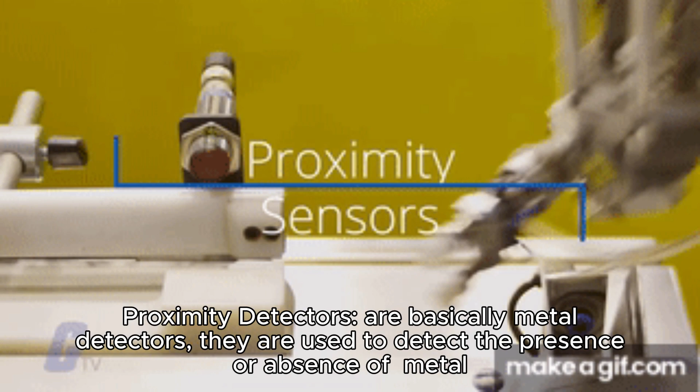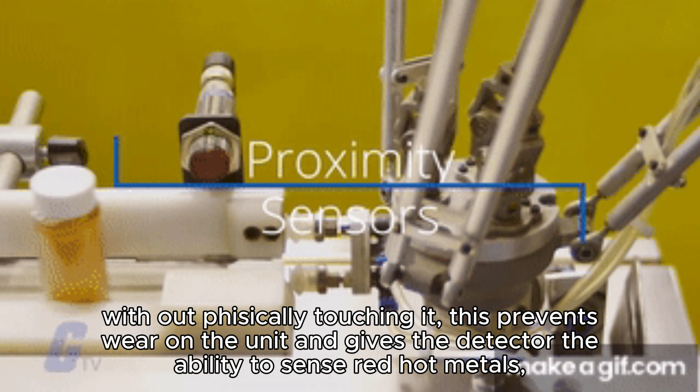Proximity detectors are basically metal detectors. They are used to detect the presence or absence of metal without physically touching it. This prevents wear on the unit and gives the detector the ability to sense red-hot metals. Most proximity detectors are designed to detect ferrous metals only, but there are some units that detect all metal.

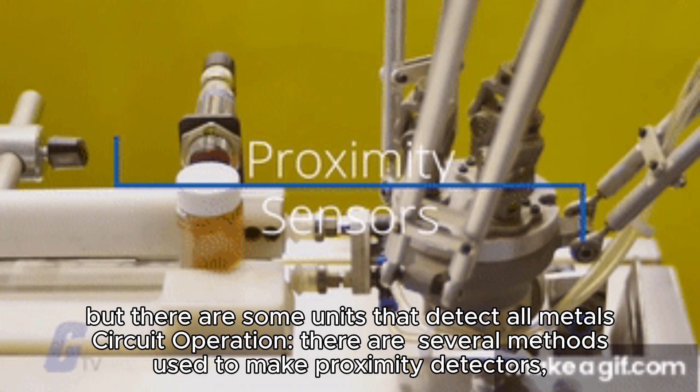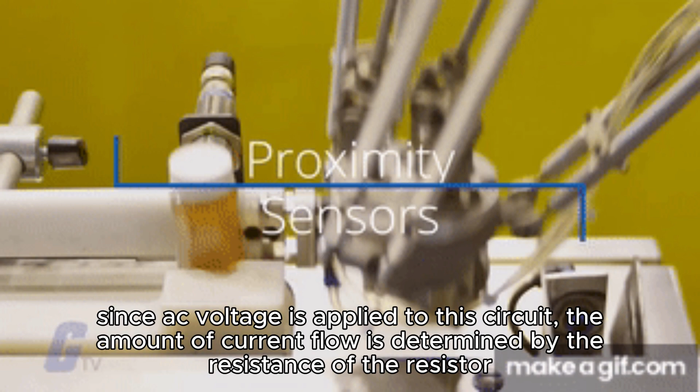Circuit operation. There are several methods used to make proximity detectors. Basically, the sensor coil is connected through a series resistor to an oscillator and a voltage detector. Since AC voltage is applied to this circuit, the amount of current flow is determined by the resistance of the resistor and the inductive reactance of the coil. The voltage drop across the resistor is proportional to its resistance and the amount of current flow.

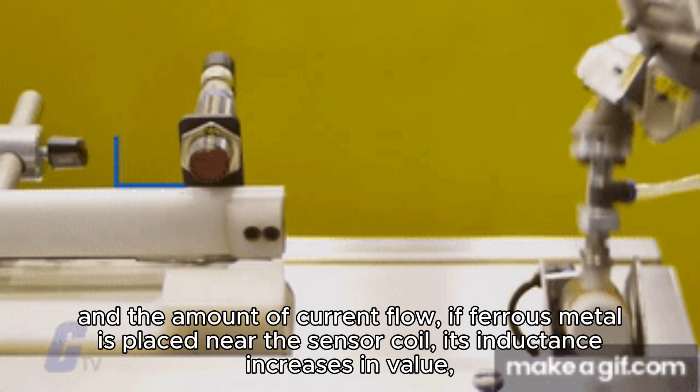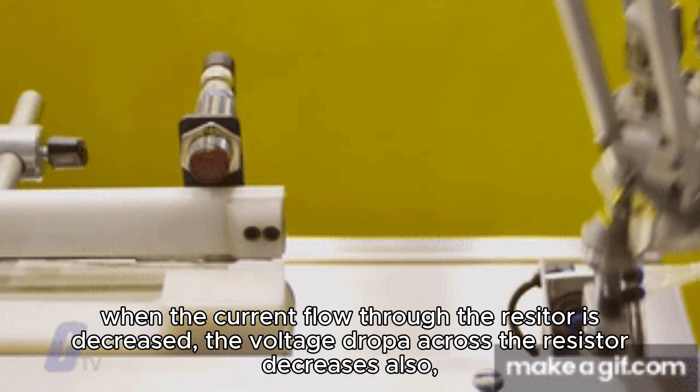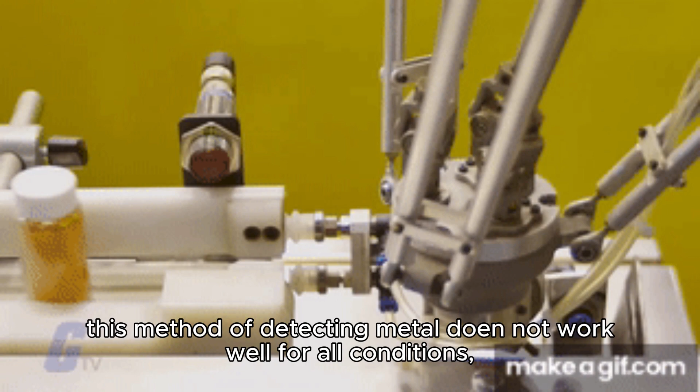If ferrous metal is placed near the sensor coil, its inductance increases in value. This causes an increase in inductive reactance and a decrease in the amount of current flow through the circuit. When the current flow through the resistor is decreased, the voltage drop across the resistor decreases also. The drop in voltage can be used to turn relays or other devices on or off. This method of detecting metal does not work well for all conditions.

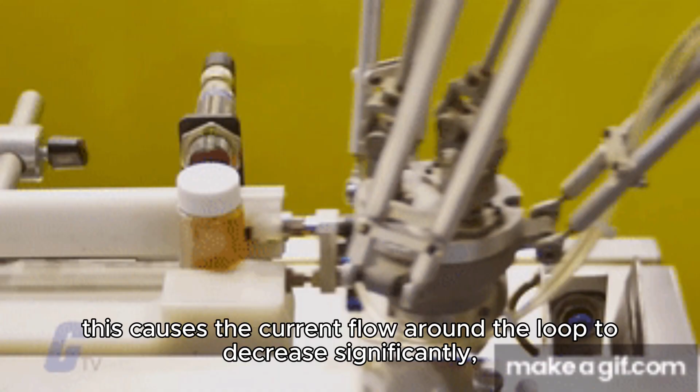When ferrous metal is placed near the sensor, the inductance of the coil increases. When the inductance of the coil changes, the tank circuit no longer resonates to the frequency of the oscillator. This causes the current flow around the loop to decrease significantly. The decrease of current flow through the sensor coil causes the secondary voltage to drop also. Notice that both types of circuits depend on a ferrous metal to change the inductance of a coil.

If a detector is to be used to detect non-ferrous metals, some means other than changing the inductance of the coil must be used. All metal detectors operate at radio frequencies, and the balance of the tank circuit is used to keep the oscillator running. If the tank circuit becomes unbalanced, the oscillator stops operating.

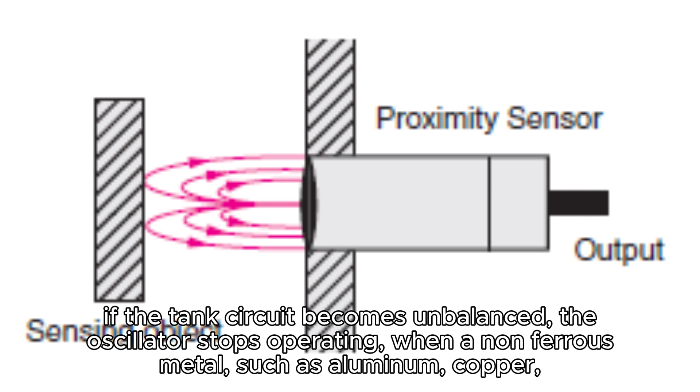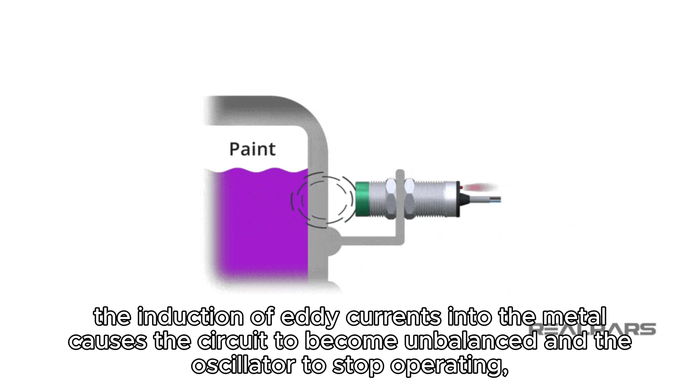When a non-ferrous metal, such as aluminum, copper, or brass, is placed near the sensor coil, eddy currents are induced into the surface of the metal. The induction of eddy currents into the metal causes the circuit to become unbalanced and the oscillator to stop operating. When the oscillator stops operating, some other part of the circuit signals an output to turn on or off.

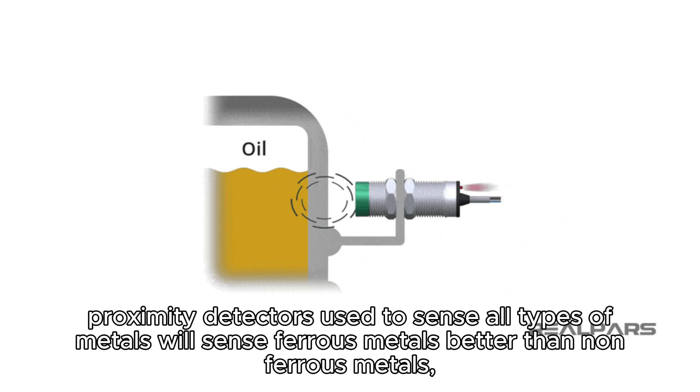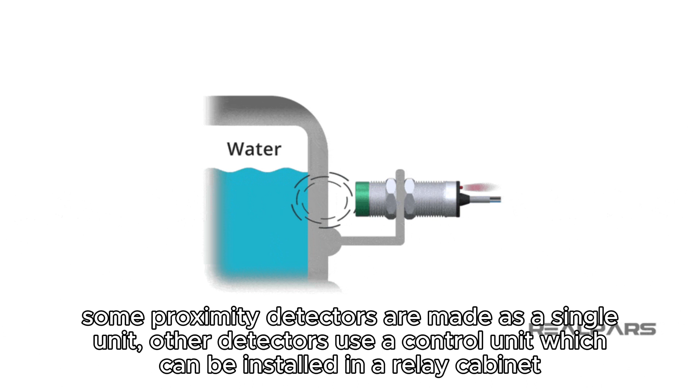Proximity detectors used to sense all types of metals will sense ferrous metals better than non-ferrous metals. A ferrous metal can be sensed at about 3 times the distance of a non-ferrous metal. Mounting. Some proximity detectors are made as a single unit. Other detectors use a control unit which can be installed in a relay cabinet, and a sensor which is mounted at a remote location, such as a conveyor line or assembly line, such as we use in PLC today.

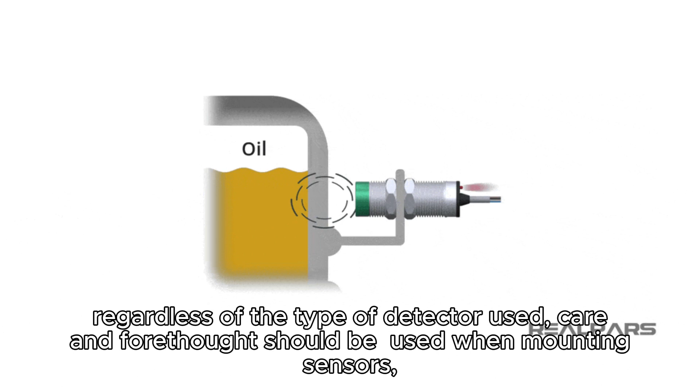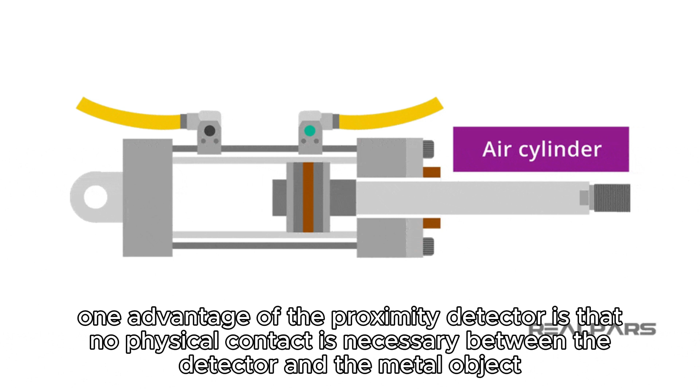Regardless of the type of detector used, care and forethought should be used when mounting sensors. The sensor must be near enough to the target metal to provide a strong positive signal, but it should not be so near that there is a possibility of the sensor being hit by the metal object being detected. One advantage of the proximity detector is that no physical contact is necessary between the detector and the metal object. For the detector to sense the object, sensors should be mounted as far away from other metals as possible. This is especially true for sensors used with units designed to detect all types of metals.

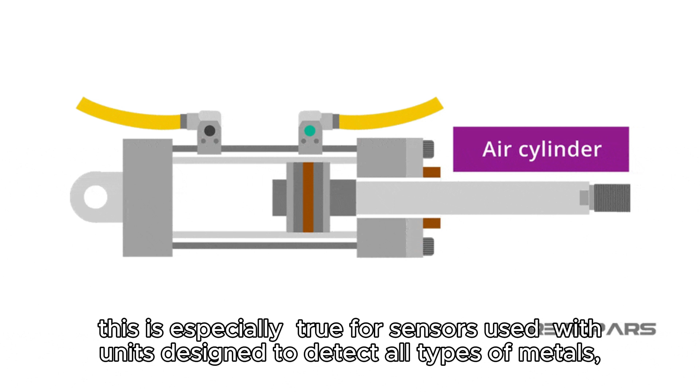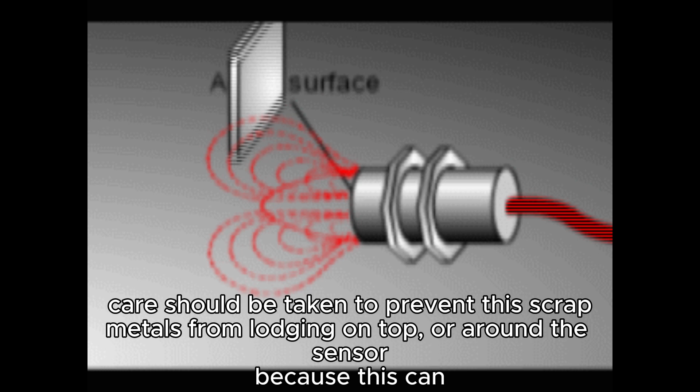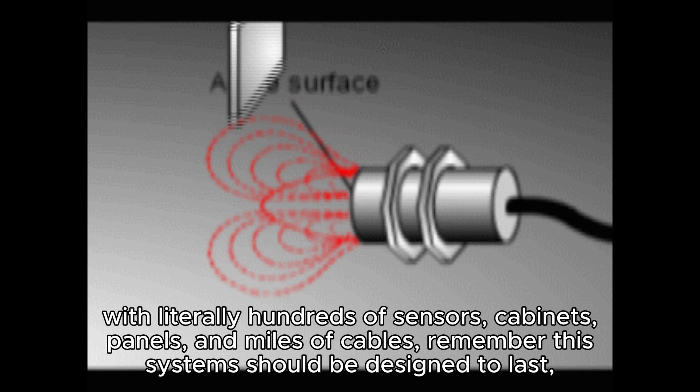If the sensor is to be mounted in an area where metal shavings or other types of scrap metals exist, care should be taken to prevent the scrap metals from lodging on top or around the sensor because this can affect performance and accuracy. In the industry, use clear, shatterproof shields to protect sensors and other parts of the intricate systems. Most industrial systems today, for example conveyor lines, can be a couple hundred feet long to thousands of feet long, with literally hundreds of sensors, cabinets, panels, and miles of cables. Remember, the systems should be designed to last and tested thoroughly.

Capacitive proximity detectors. Although proximity detectors are generally considered to be metal detectors, there are other types that sense the presence of objects that do not contain metal of any kind. One type of these detectors operates on a change of capacitance. When an object is brought into the proximity of one of these detectors, a change of capacitance causes the detector to activate. Since capacitive proximity detectors do not depend on metal to operate, they will sense virtually any material such as wood, glass, concrete, plastic, and sheet rock. They can even be used to sense liquid levels through a sight glass.

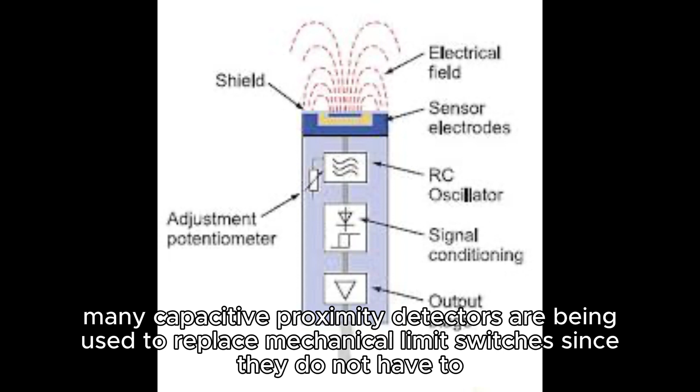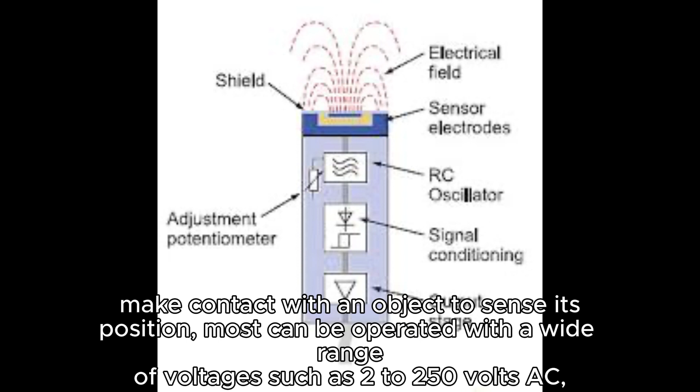One disadvantage of capacitive proximity detectors is that they have very limited range. Most cannot sense objects over approximately 1 inch or 25 millimeters away. Many capacitive proximity detectors are being used to replace mechanical limit switches since they do not have to make contact with an object to sense its position. Most can be operated with a wide range of voltages such as 2 to 250 volts AC or 20 to 320 volts DC.

Ultrasonic proximity detectors. Another type of proximity detector that does not depend on the presence of metal for operation is the ultrasonic detector. This detector operates by emitting a pulse of high-frequency sound and then detecting the echo when it bounces off an object back to the sensor. These detectors can be used to determine the distance to the object by measuring the time interval between the emission of the pulse and the return of the echo. Many ultrasonic sensors have an analog output of voltage or current, the value of which is determined by the distance to the object. This feature permits them to be used in applications where it is necessary to sense the position of an object.

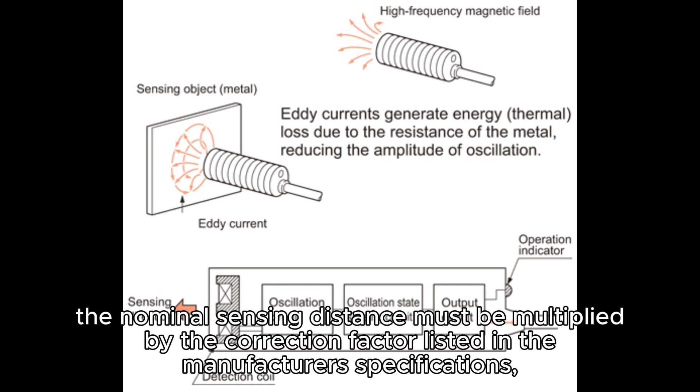Things to consider when working with proximity detectors. Sometimes, depending on the manufacturer of the sensor, it will be necessary to make some target correction factors to determine the sensing distance for materials other than the standard mild steel. A correction factor is used. The composition of the target has a large effect on the sensing distance of inductive proximity sensors. If a target is constructed from one of the materials it detects, the nominal sensing distance must be multiplied by the correction factor listed in the manufacturer's specifications. For example, ferrous selective sensors do not detect brass, aluminum, or copper, while non-ferrous selective sensors do not detect steel or ferrous-type stainless steels. That is all for today regarding proximity detectors, commonly known as proximity sensors.